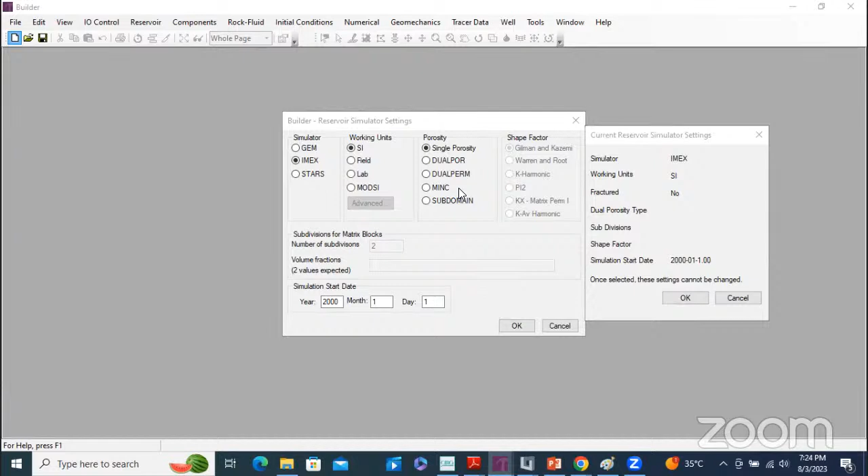He also asked about the porosity: single porosity, dual porosity, dual permeability, or other. Then he confirmed the simulator will be IMEX, the units, and the starting date. Any other questions? Okay, then tell okay.

From this screen, you will find an organized workflow to build your model, even a model tree view like that, or from above. After edit, view, and IO control, you will find reservoir, component, fluid, and rock fluid.

With relative permeabilities and other capillary pressure, initial condition, initial hydrodynamic model, and the numerical application. Also numerical and optional modules related to geomechanics and tracer, because this is very important if you go for advanced EOR to test, simulate, or make a study for EOR. Then data related to well and other tools.

We will investigate these tools while we work. There are options related to window arrangement, like horizontal, vertical, or going from window to window, here to here, to move to another window.

To start your reservoir, you must create a grid or enter your static model, because CMG is not a static module like Petrel or Petrel static or Decision Space, but it can use the exported model from those. In another way, you can build your model here too, in a similar but less complex way than Petrel.

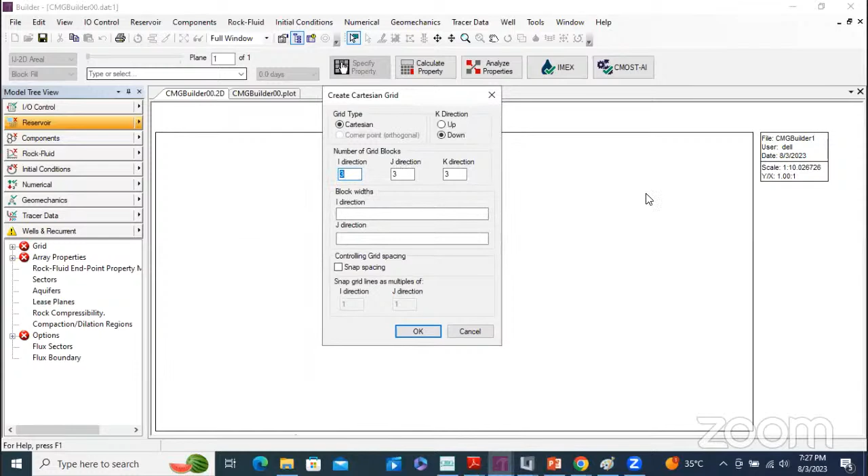Now I will select Cartesian, and I will put 3 blocks in the I direction, 3 blocks in the J direction, and 3 blocks in the K direction. Then I'll tell you - please write your question, and by the end of the session I can answer it.

So 3 blocks multiplied by the thickness of the block. It will be 3 blocks multiplied by, for example, 10 meters, and 3 blocks also multiplied by 10 meters for J. For the K depths, I will manage it once I build my model, my grid. So I will click OK.

So I have a grid like that, it's 3 by 3. Then I will go to this tab, it's called Prop Mode, and try to fill the properties of this grid.

He will ask me what is the grid top. Simple way, I will tell him layer 1, for example, 1000 meters subsea, and grid thickness: layer 1 will be 5 meters, layer 2 will be 10 meters, and layer 3 will be 7 meters. And then...

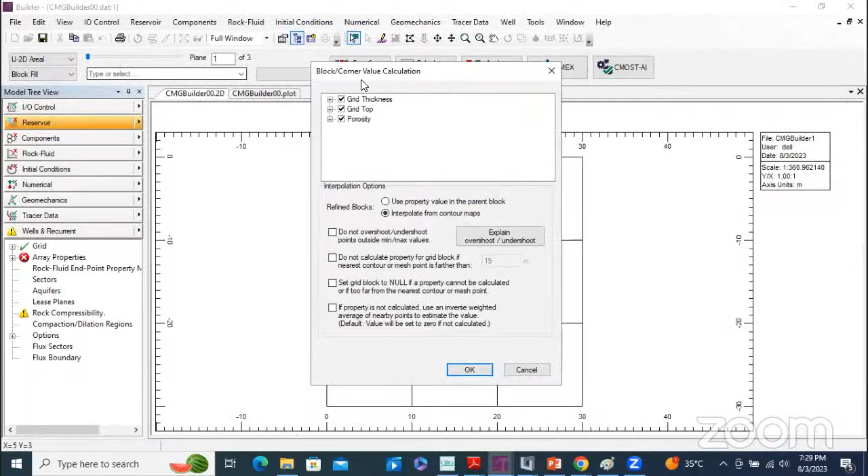Okay, and then for porosity I will also make it different: 0.2, 0.10, and 0.3. For permeability, I will make a function, so I will click here, okay. Then he informed me that I changed the grid thickness, grid top, and the porosity.

I tell him okay. So it's easy to go here to select your view: areal, or IK 2D, or JK 2D, or select 3D view, and from here it's easy to make a rotation. And from here it's easy to zoom in and come back.

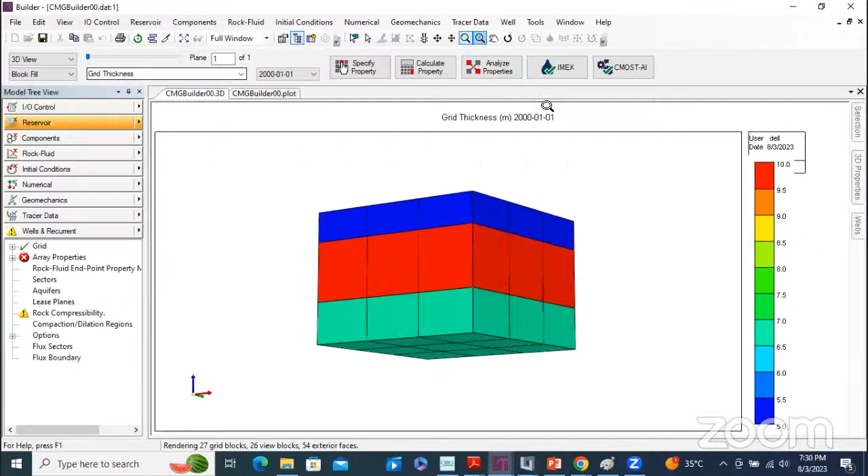So from tools we create a formula and we tell him new, add independent variables, and select, like, porosity. Okay, and this formula is related to permeability.

And we'll create a function between permeability and the porosity. So insert the selected formula, which means permeability equals porosity, for example, multiplied by 0.10%, from porosity. After that, we tell it to apply.

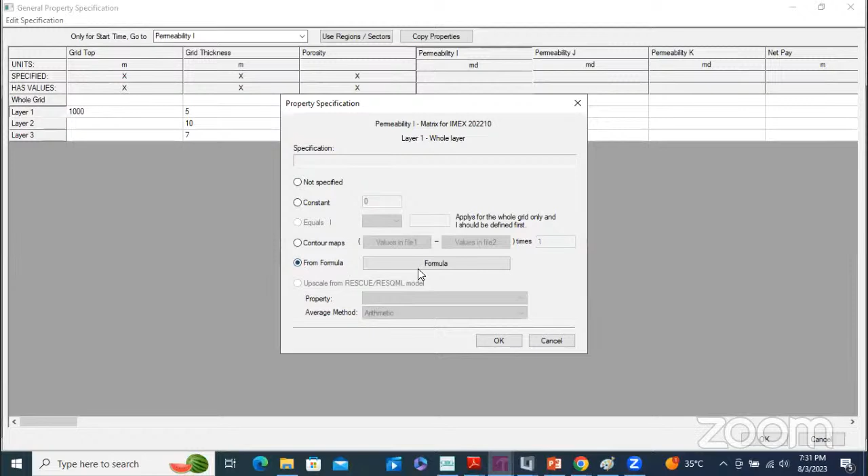Okay, and change the wrong to right, correct, and then click okay. Then specify the property again, and in permeability, we go to layer 1 and select formula, and from formula select here and select this formula. Okay, so the formula will apply in layer 1.

I can go make a copy and apply paste for the second layers. So I have applied the formula for all layers.

Then for permeability J, it's equal to permeability I. So for the whole grid, I can go and tell it not formula, but equal. It will give me a screen and ask if I want a constant value or equal I - yes, equal I, and tell him okay.

For permeability in direction K, I'm assuming 0.10% of permeability I. So I will give it, not formula, but equal, and tell him equal, multiply by 0.10, 10%, and okay. Then click OK. I changed now permeability I, permeability J, permeability K.

Yes, if I need to navigate each property from here - permeability I, permeability J, and also permeability K - you will find the scale here.

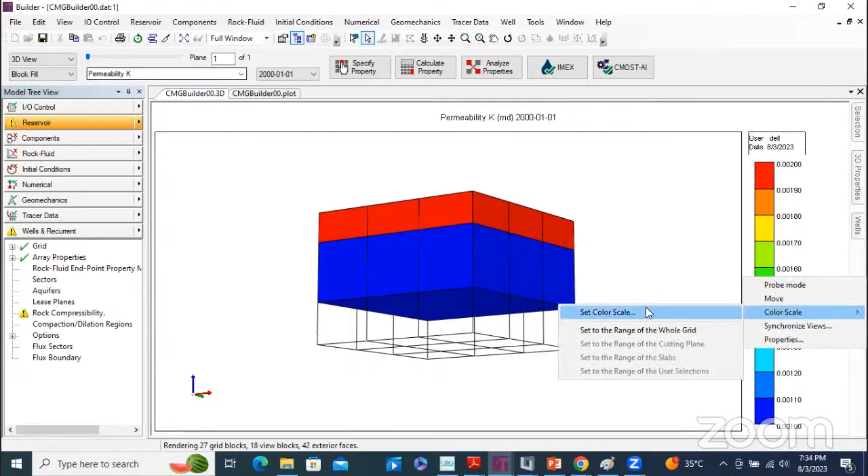Okay, so he made a filter. Anyway, if I need to select the original scale, I can go to color scale, set color scale, and select all the grid and then apply.

If I need to show the statistics inside this box, I can go to tools, then grid property statistics. It will give me the total number of blocks, 27, and number of active blocks, and total pore volume, and also statistics for permeability, like shown here, the minimum value and the maximum value, and also average value and the weighted average value, and also per each layer what is the percentage inside the graph.

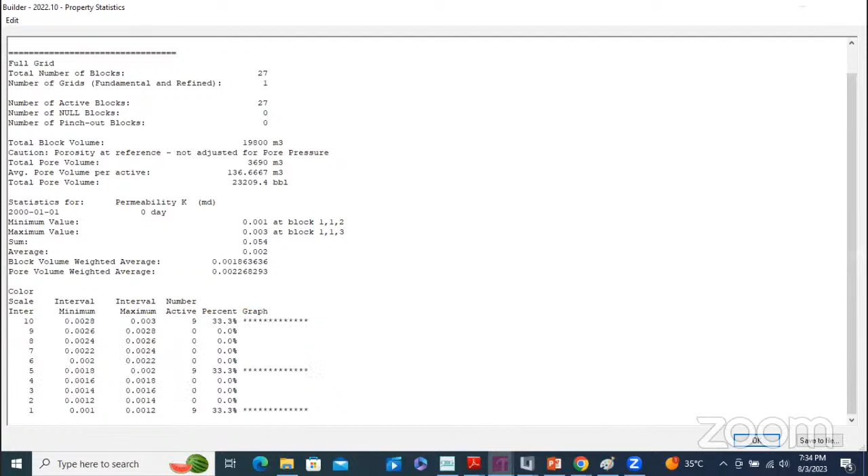So it's an easy way, if I change K permeability, it's easy also to go for the other parameter and check.

Just for the easy way, like I mentioned to you, every time you finish a step, it will be marked correct with green. If a parameter is still missing, like here, it will give us a warning. So it's easy for any engineer to follow step by step to build their model.

But now I just need the step to create a grid to start my work. The simple way, I just create a simple grid like that. If I need to know what is the problem, I right click and click validate.

It tells me a validate component is required, we need to fill this. I must require at least one table. So it gives a guideline to solve your problem, in easy language and easy steps to finish.

Again, if you go here, there is one parameter needed to finish. Maybe the model can still run, but it's mandatory for reservoir engineering, so it puts a yellow rectangle, triangle like that, and you should change the compressibility, something like that. So this is the first step.

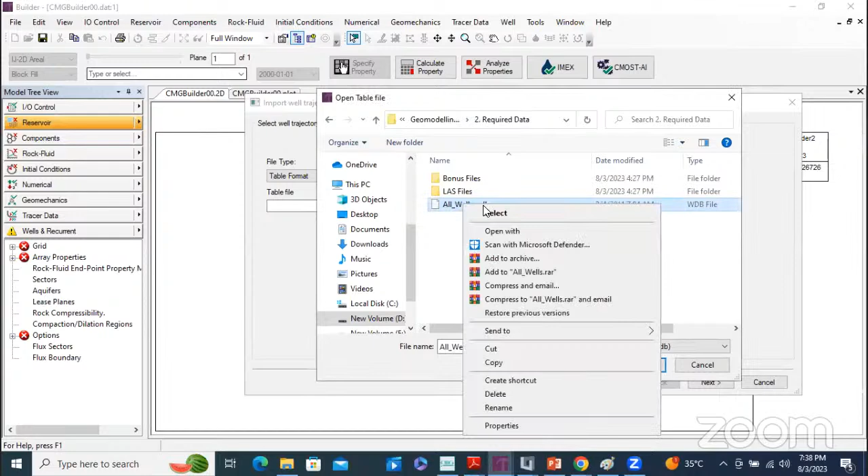Okay, so this is the table of all wells. If I open it, you will find units is meter, the same which I built. The name of well ID, and date, and X and Y, TVD subsea, and measured depths. So this is a normal table, and then I will open it.

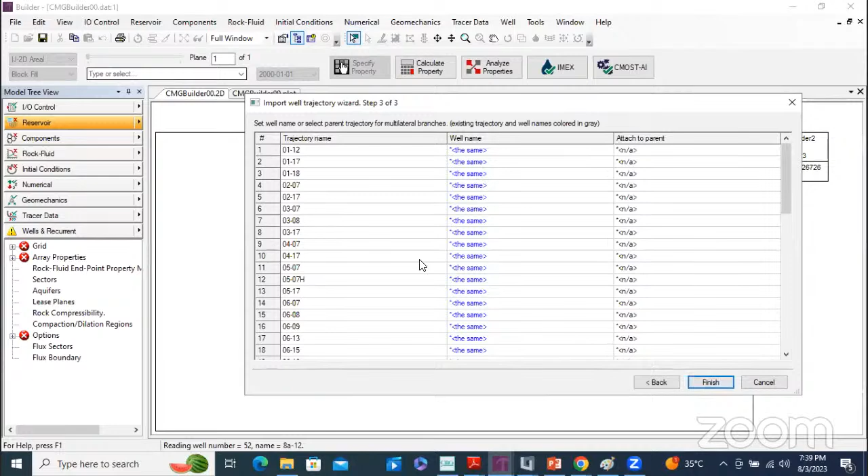Next, I will put him like that. If I need to deselect one of the wells, I will deselect. And then next, if I need to change the name of the trajectory, I can change from here like this, I can change the original name to match the trajectory, something like that. And I will make a finish.

So I loaded all the trajectory. If I make a zoom, okay, I zoom to the well here. It's a vertical well, but you will find the name of the wells in the bottom.

Like any software, if I need to change the properties of this screen, I will right click properties. This is the well trajectory, I will search for a well trajectory here, so I will go to here.

Then I will tell it to display on the top. That's it, simple way - change the location of the label to display on top. After that, I need to load the top formation into Builder.

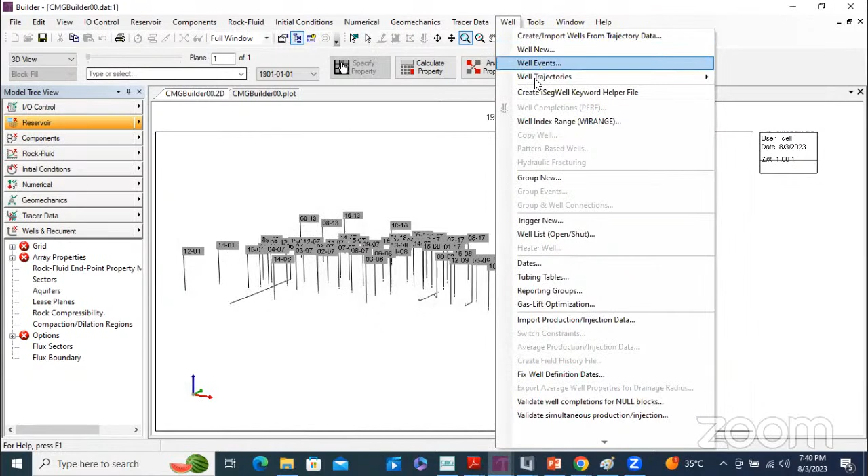I will go to well, no new well event. I will go to well trajectory, and from well trajectory there are options like import well log and import formation tops file. I will go to my folder.

Geomodeling, okay, required data tops. I will open it just to check. Okay, so there's the name of the well and also top and measured top, like that. Simple, not bad, simple table just to use as data entry for our model.

Okay, it asked me, the builder asked you to enter top, but there is no bottom, and you need to enter it. No, I don't need it now, so I will skip it.

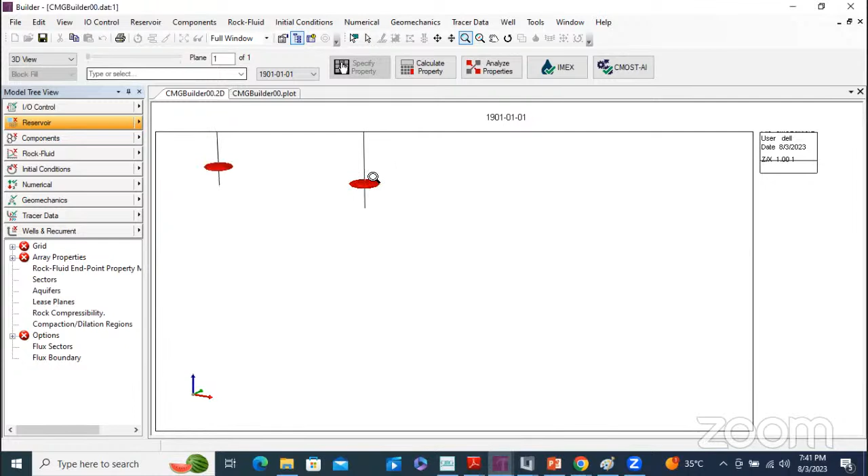Okay, did you see it? It's like red - this disk represents the tops of each well.

Then after that, if I need to change also the shape or anything related to the tops, it's easy - I can go to properties, well trajectory tops, and change the color. Let's change it to orange. Let me select another, dark green - apply, and change it to dark green.

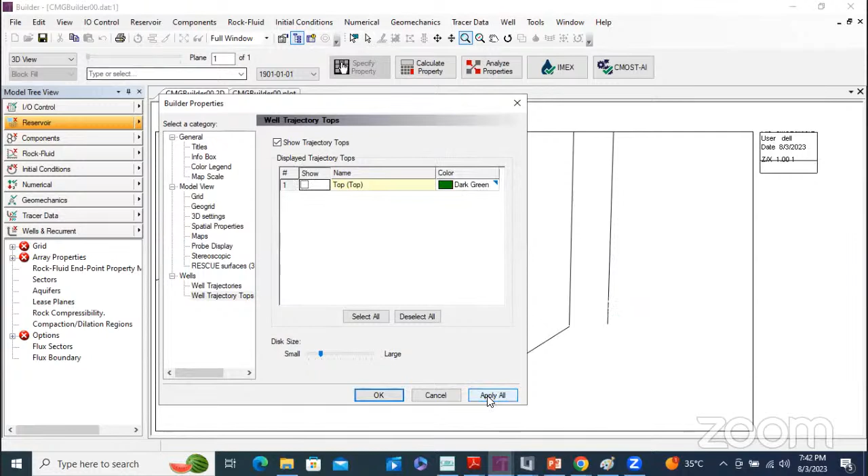Okay, so I input the well trajectory and the disk of well top. Then I need to create a map to make a contour mapping, and after that I can easily create any grid issue or something like that.

So I will create a map file, and this is the map file, whatever the name. And from here, I will go to import the logs with the well tops.

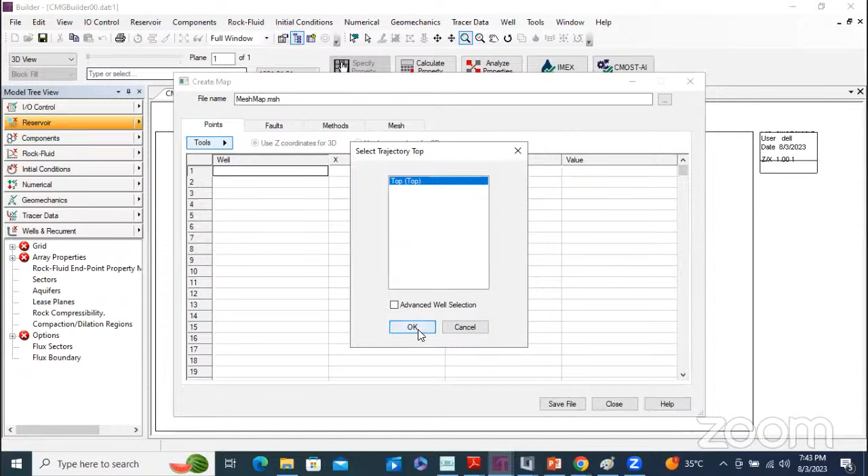So at this point, it can easily create - sorry, from here I will use the well trajectory to create my map. So import tops from trajectory, yes, using the tops. So well X and Y, and also put the value of the top here.

Then, fault - I can put fault, but in this case I don't need that method. Then I need to distribute the spacing of the tops between the shape of the round between the tops.

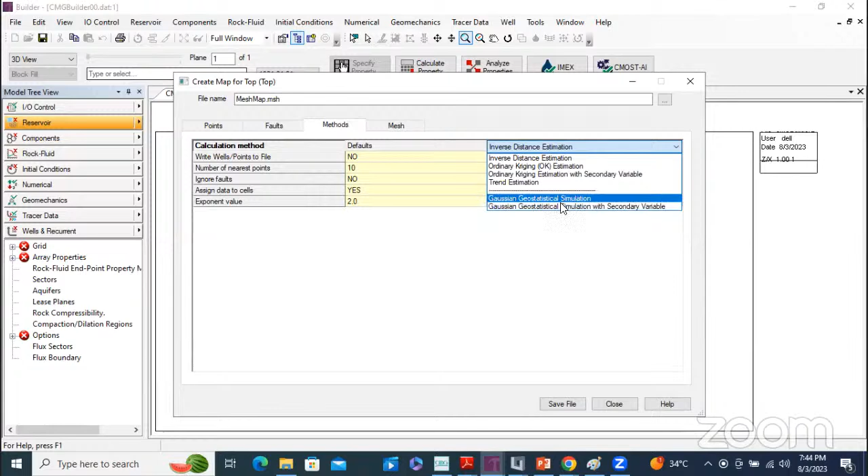So I use the statistical method to create this distribution. There are different ways to create simulation, geostatistical simulation, to create these tops. For example, I will select here, and change not in one direction but in two directions - so I will tell you by one direction.

So then I will check the variogram between tops and the variance between tops, simulated from the software, from Builder, and the actual data. So the dots, this one and this one, represent the actual variogram, and this is the data from the model.

After that, I will try to move this point - sorry, I cannot, okay - move this point to try to match between the simulated data and the variance, whatever comes from the simulation, which is the actual variance between the actual tops.

I can show that. Once I have the match between the simulated data and the actual variance variogram, it can be used to build my model, or to build the contour map as the first step of this method. So it will take time.

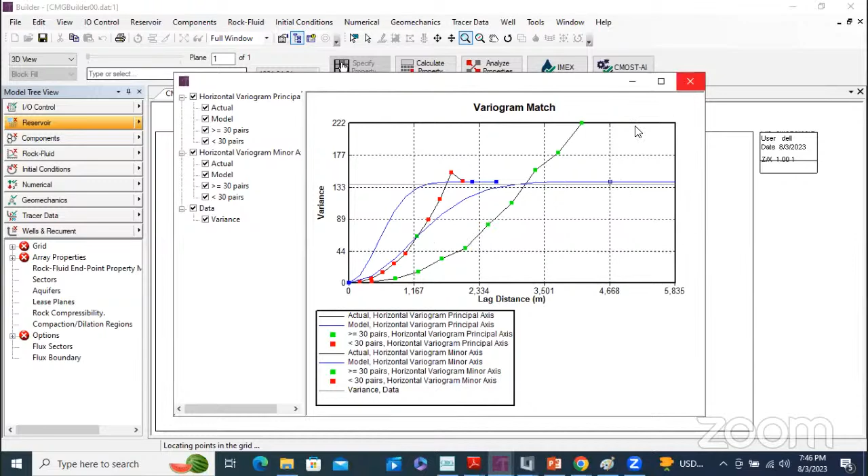So I will change it to Gaussian, then okay, and then check the variogram again. There's a change in shape, try to rematch, and so on. Anyway, I will not complete this now. Then in mesh, I will select how many mesh points to be used in this step, and if it's okay, I will tell it okay at the end.

But let's load the good one. So, open map file - it's saved in CMG mesh format. I know that, so I will use it and go to the folder.

Here - okay, and then top map.mesh, and then okay. If I change the view to 2D, I have a contouring map using the top and trajectory.

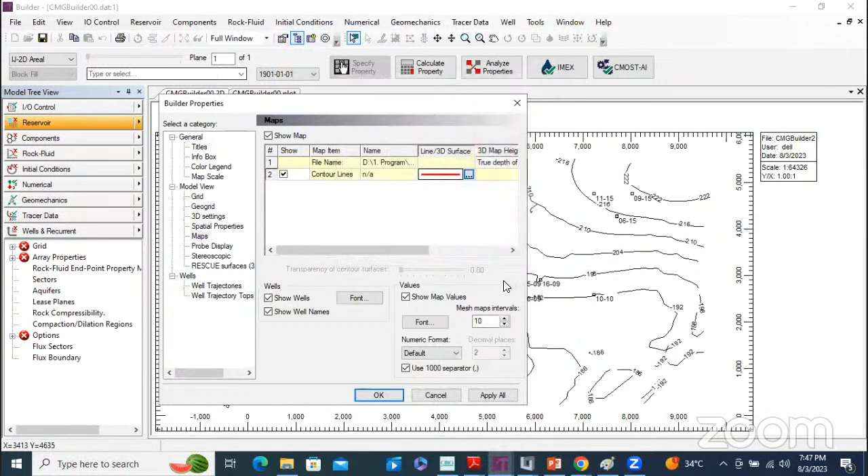If I need to change the thickness of the contour or color or something like that, it's easy - on this step I will right click properties and go to grid, then go to map. In maps, there's a contour map option. It's easy to go here and change the color, for example to red, increase the weight, white, and apply all. It's easy to change it.

So I have a contouring map using trajectory and tops. And now I will create a grid to create a box model, whatever - create a shape of the reservoir to be used for the model.

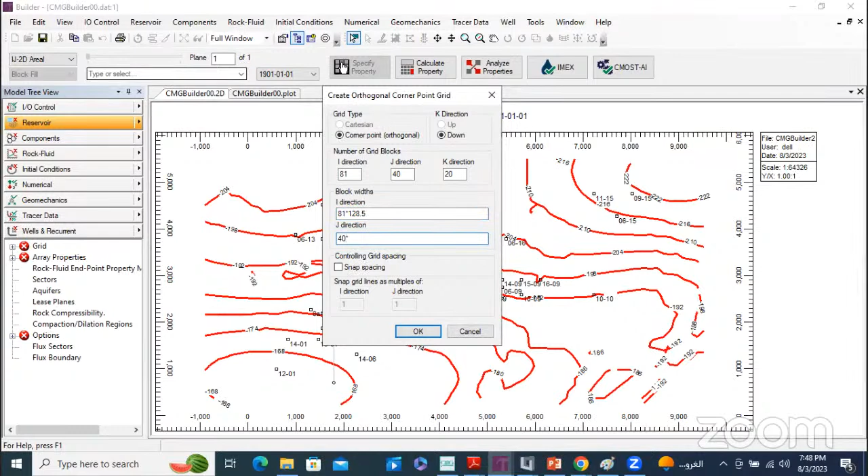I will go to reservoir and create a grid using orthogonal corner point. I already did this before, so I'll tell you how many blocks: 81 in I, 40 in J, and 20 layers. So I will write 81 blocks multiplied by 128.5 meters, then 40 multiplied by 128.5. Then I will click OK.

I created the mesh grid, but unfortunately its position doesn't match the map. So I will go here again, edit grid, reservoir, edit grid, modify position. I find the Y offset here is 5,300, so I will change it to 0 and click apply.

Now it's okay. So I created a grid, and a simple contour map using trajectory and the tops. Now I'd like to make a thickness for each layer, create tops for each layer, identify tops for each layer, and also thickness and all the other properties.

From here I go to Probe Mode, called Probe Mode, and specify property for these grids. Until grid top, I will go to layer 1 and click here. Do you remember we already created a map? It's called mesh map with geostatistical distribution between tops, so we'll use this map for grid tops.

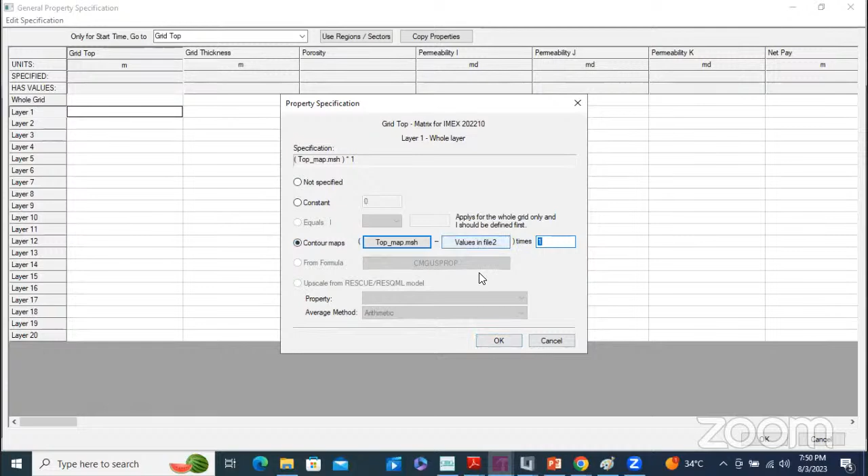So we'll go to geological map and contour map, value in file. We'll go to file, top map, until open. We don't multiply by anything or subtract anything. So this is the top map.

For thickness, we have another map, the thickness grid. We will use it, contour map, and it's called thickness map dot mesh also. There are different extensions if created by other software.

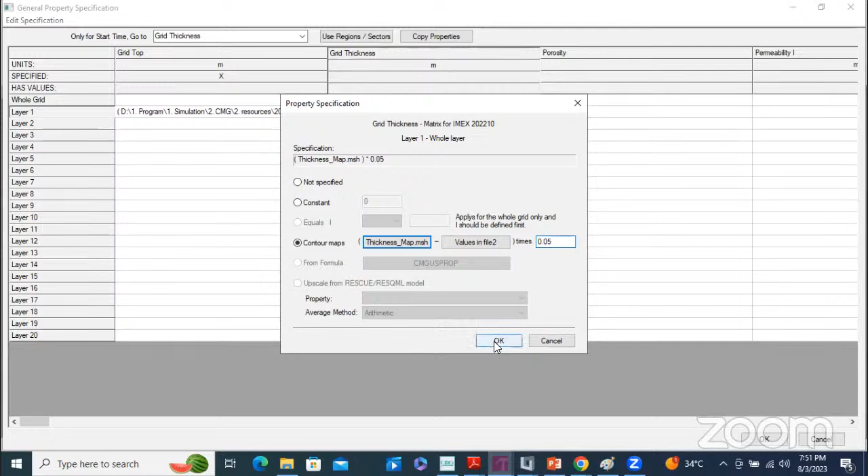For thickness, we will multiply by 0.05, to divide the net pay thickness into layers. This is a simple way, just a simple way. If you have logs, we can distribute using logs instead, to find the thickness and make a best fit for all layers.

Now we have a grid and thickness. If I click OK, you get the grid, grid thickness, and grid. Yes, OK.

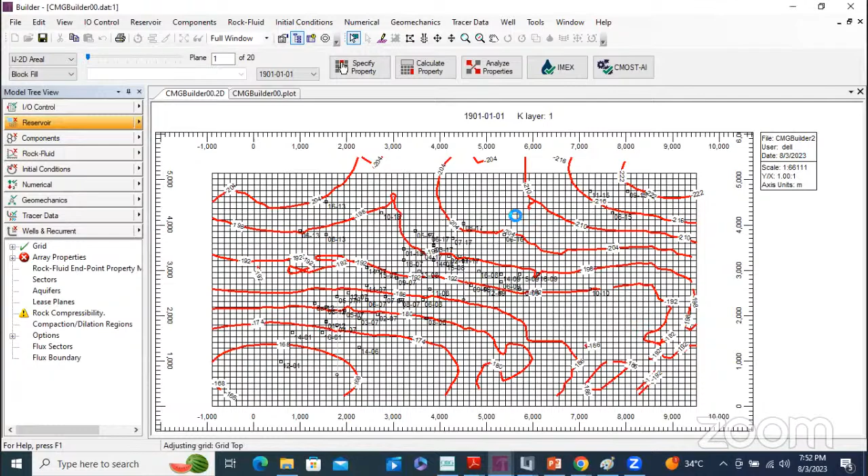So in just 10 minutes, you create your grids. And if you go to 3D view, it's easy. I need to not show the contour map, so I click properties, for the map contour I click here. It's easy, and then it's easy to zoom and define each layer.

Now I need to make a distribution for properties. Do you know how to distribute the tops? We will follow the same methodology, but using logs, not formation tops. We'll use logs to distribute porosity, permeability, or anything. So we'll go for reservoir here.

If I go here or here, I will select here, then go down. There is geostatistical, I can select here. Then I will create a new one from here, name it. It's empty, so I will create a new one and call it porosity underscore simulation.

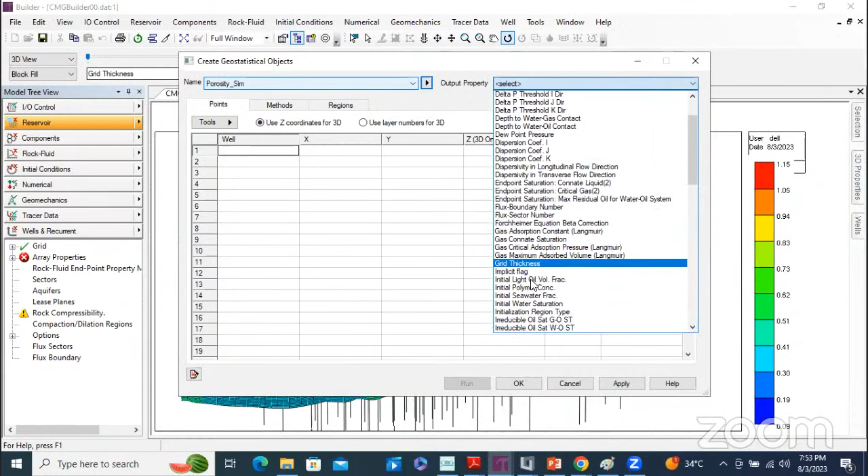Then I will tell it I need to distribute porosity, so I can click P and it goes directly to porosity. Now I'd like to load the logs which include porosity, so I will go to tools, import the data from import logs or table of measured depths logs.

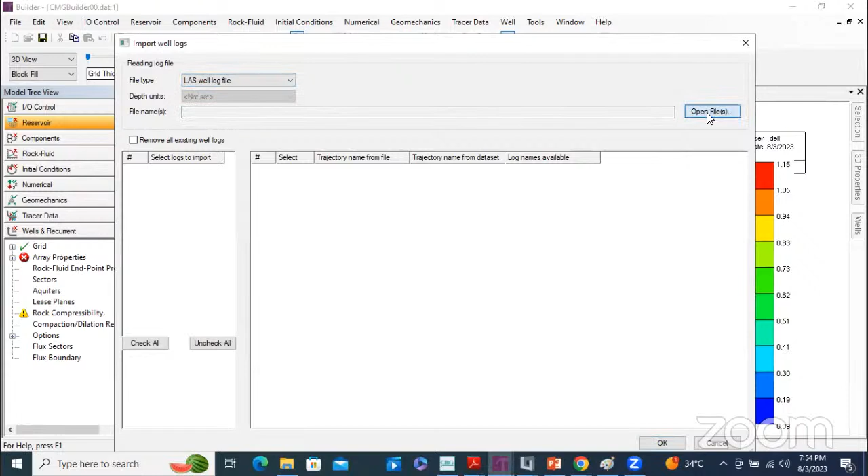We normally use a LAS file. So open file and LAS file, select all wells here with Control A, and open. It's easy to download. Now we'll click to load, it takes about one minute, and now we're loading all logs, and then we will select wells.

If we go, we can select well by well, or we can select all right here. Then click OK. Now we need to select the name of the log to be used, which is porosity, so we'll use the porosity log.

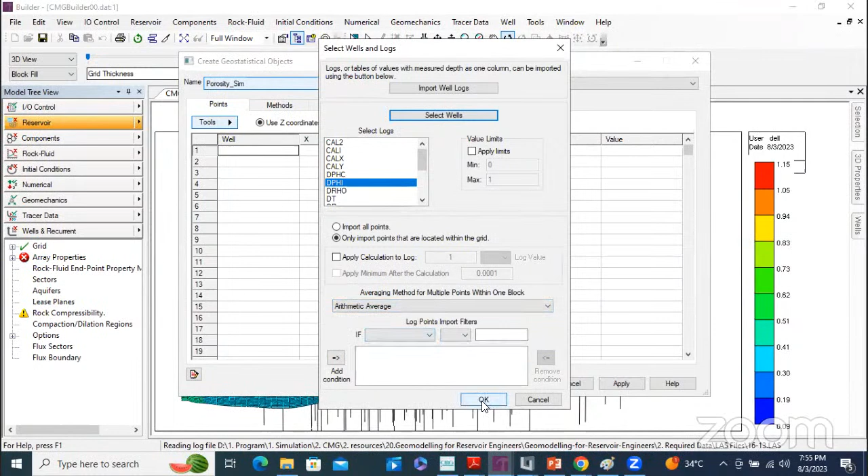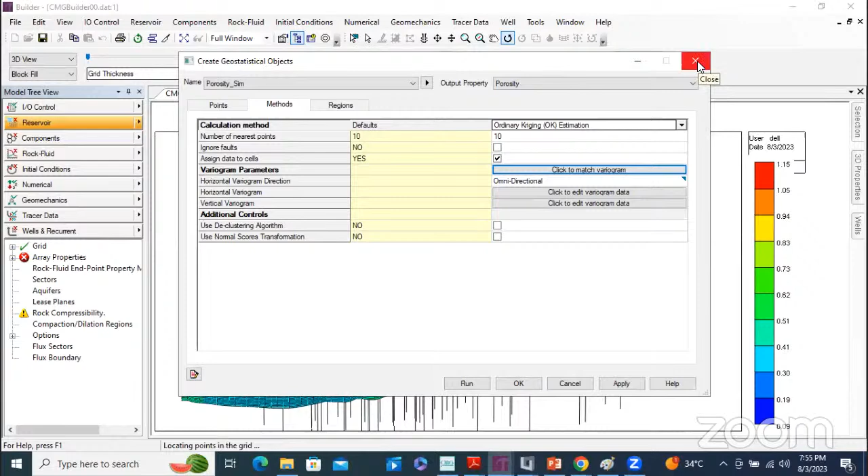After that, we should follow the same methodology like the tops, to make a distribution using statistical and geostatistical methods. Here is the function, and here you can see the variogram and check the match. For all properties, we do the loading like that. I will show you now.

Cancel, yes, I don't need to save, and I will close these also. I will go to open the one I have, the model distribution, after completing all distribution of all properties. It searches for a mesh map location, so I will go to it. Okay, okay.

Here, after loading all the data, especially for the grid, in this GeoModeler all components are already loaded. I will go through that, but anyway it's correct, meaning every parameter related to the reservoir is defined.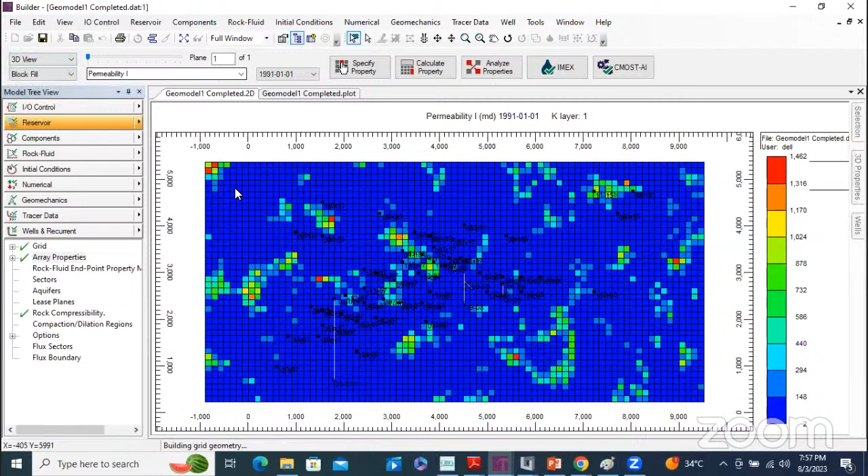Porosity also, all of these things, and rock compressibility - this data is already defined for these grids. If I check the 3D model, 3D shape, it also defines the 3D shape here.

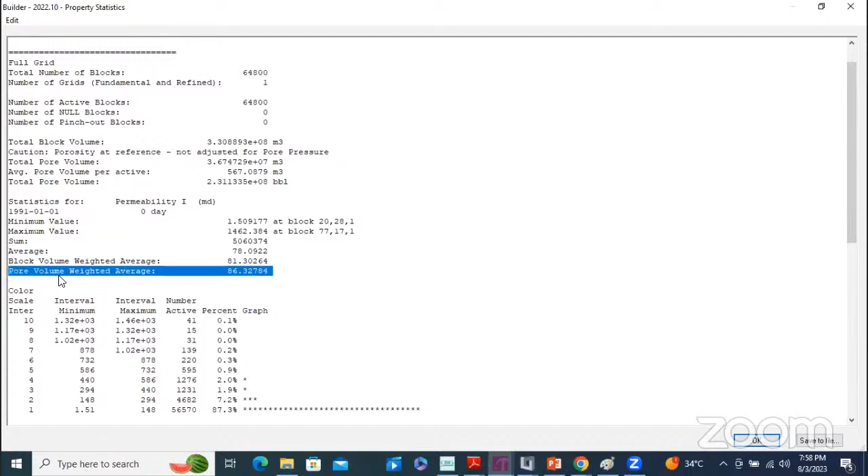I can make a filter by changing the range, or I can go to tools, then grid, and property statistics - it's easy to find. This shows normal information about the grids, and statistics for permeability: the minimum value, maximum value, average value, weighted average value per block volume, and weighted average value per pore volume.

Okay, so I have statistics and definition of the grid. In parallel, also in CMG, if you select Probe Mode on permeability, it's easy - if I click the left button on my mouse, I can easily check block by block what the permeability is. This is 40 millidarcy.

If I go here, this is a higher permeability, 633 millidarcy, and so on. So I can check the model like that.

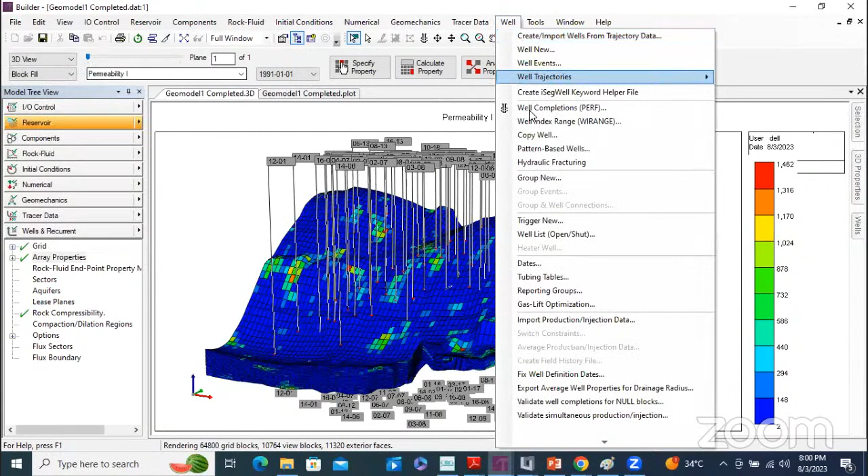A second way to create your grid before you start the model: the first way is to go here and simply create a grid - Cartesian, radial, or something like that. The second way, as we showed now, is from tops - well trajectory and well tops - then define from the map, and then make it geostatistical.

Somebody asked something - not showing depths until the unit is set in the software. The unit is usually not defined until the first step of building the model. So if I go here, I will close and create a new one. You should define the unit before you start - check what unit is used in logging, and what unit is in your data before you start to build your model.

I think and believe in Petrel also, before you build your model, you should define the unit, because there is no converter once you build the model. Here it's also the same as Petrel.

Okay, we'll go here to the model. Now I'd like just - okay, I don't know, there's something wrong, but no problem. I don't know why it changed, but okay, close. This is not the completed model.

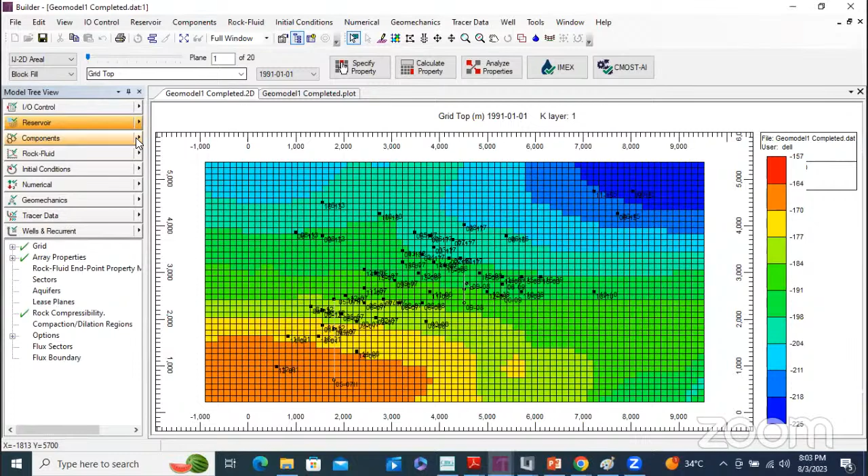So from here, if I select a component and go here, it's an easy way to create or generate your model by black oil - or if you don't have lab experimental data and equation of state, you can use a correlation instead.

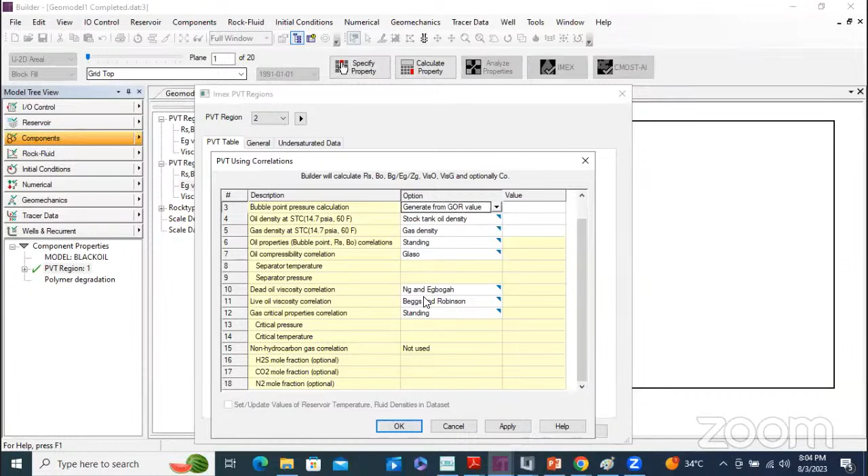So from here you will add a PVT, and then generate the PVT table using correlation - a simple way. You tell it some parameters related to reservoir temperature, bubble point if measured, or calculated from gas-oil ratio, densities, something like that - and what correlation you suggest to build your properties. With simple information, it's easy to create these properties.

I will delete these, yes, I don't need them. And if I go to... sorry. That's it.

So here, this is the data already entered into this software. He defined only temperature, oil density, and gas gravity. For oil density, you can select stock tank oil density in normal units, or a specific gravity of oil, or API. For this example, the API is 35 degrees.

It's easy. Also for gravity of gas, what is the water phase, for the formation volume factor. These items are defined, then you generate water properties by defining temperature, reference pressure, and salinity. After that, the software directly defines the properties of water.

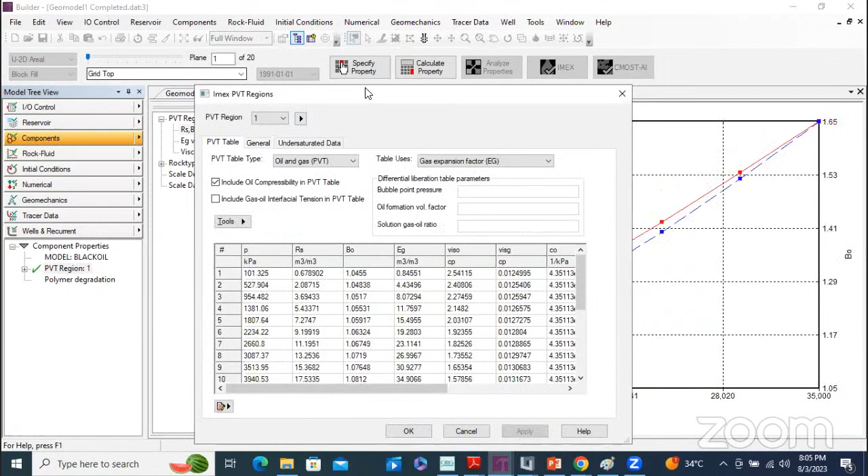That's it, a simple way to define your PVT if you don't have a complete PVT. If you have a complete PVT, it's also easy. You can go here and input a PVT table, generate it, and once finished, click apply. The PVT table will be created directly.

Another way, if you have a PVT table, it's easy to create it - just copy paste. The other point is you can create a PVT using a CMG application like WinProp. It's a compositional equation-of-state application to create a model of the fluid, and it's specialized also for heavy oil, solvent mixtures, and CO2 mixtures. So it's beneficial to use for EOR projects.

Okay, let's go to Builder. So this is the components section where you enter your components. If you have a WinProp generated model, you can create it or launch WinProp from here and start editing that. The main advantage for CMG, if you go to component, there is something called the process wizard.

From the component process wizard, if I select it and the model is black oil, it gives me an option to create issues related to polymer injection. It gives guidelines for this, like the upper viscosity limit for polymer, and the lower minimum average permeability, as a guideline to support any engineer to work easily. It also requires parameters like polymer half-life and other parameters needed for your application, so it facilitates your work, especially in a complex project like EOR.

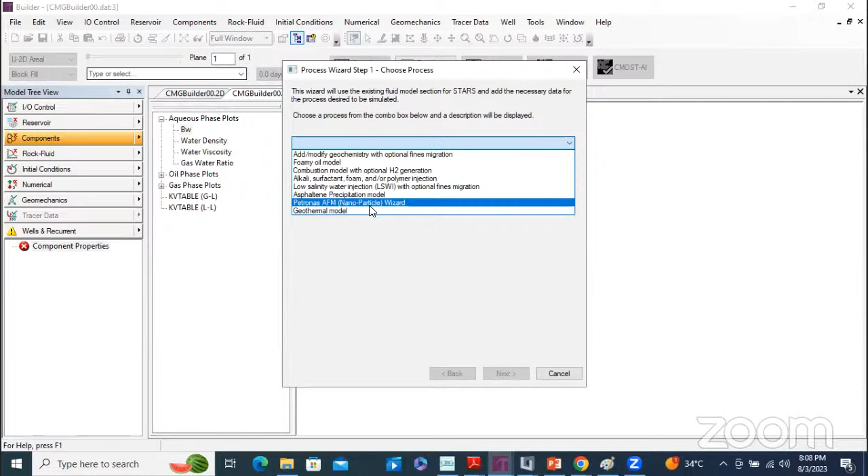If I go to component here, like I mentioned, and go to process wizard, there are different applications like add/modify geochemistry, foamy oil, combustion model with optional H2 generation, low saline, alkaline, surfactant, foam polymer, asphaltene precipitation, nanoparticle, and geothermal model. If I select geothermal model, this is a new application for any reservoir engineer that will be used in the future.

It gives us some indication to work on it, and lets us choose a geothermal model we need, for example loop, which is easy to fill up and facilitates your work. So CMG is not only a simulation tool, but also facilitates your work as an engineer working in EOR.

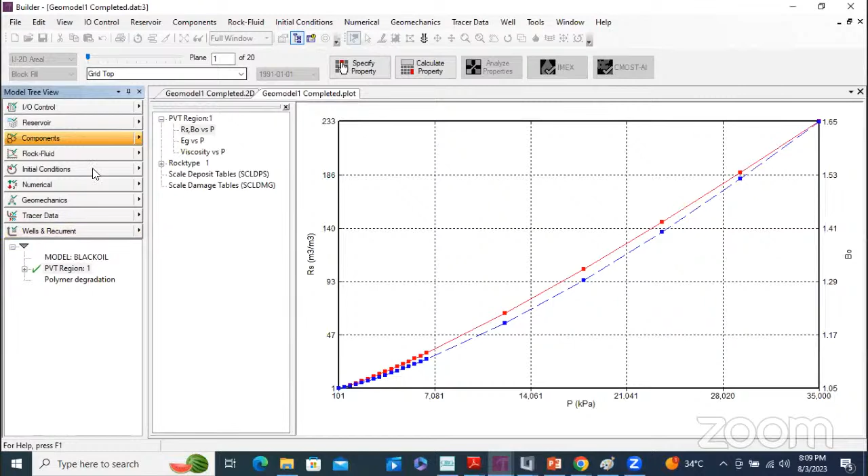Now let's go back to Builder, and I'd like to show you the option also for relative permeability. If I go to select rock fluid, and select rock type here, it's easy to generate a table using correlation - just enter the endpoint and put the exponential parameter here.

It makes a suggestion for the exponential, like 1 in a fracture or system or something like that. So it guides you to create the curve just using the endpoint and the exponential. Easy to create, or you can paste the table. Also include capillary pressure here in your table, and due to injection you need to work on hysteresis modeling, so it gives you also an option related to hysteresis.

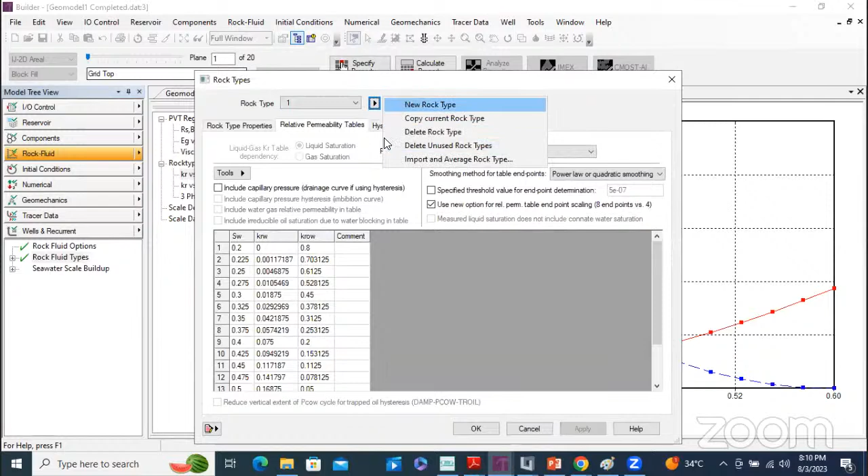Sure, you can create different rock types by creating a new rock type here and then distributing this rock type on your grid. It's easy to change if you're working on a history match and need to adjust this curve - just move it from here. It's a good option to change the shape of the curve.

Once you change these points, it directly changes your table. These points will affect negatively once you run the simulation, so you need smoothing. In the tool, you give a smooth table and click OK, and it will smooth this table.

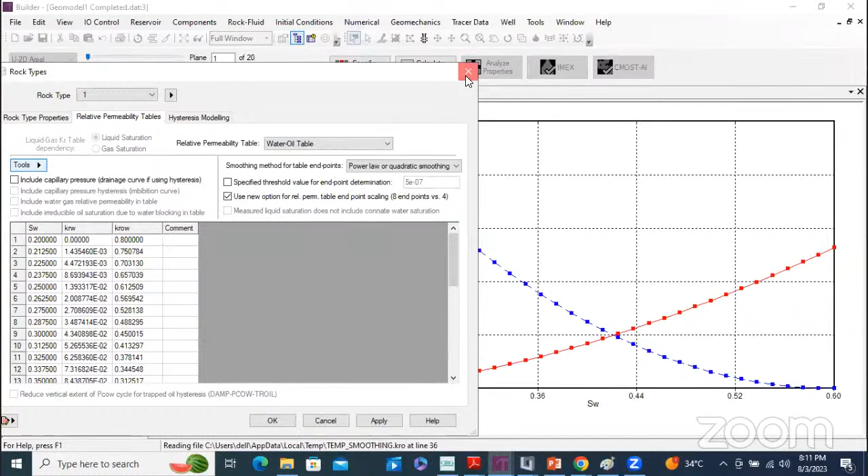It's easy to build your relative permeability curve, easy to move or change the shape of the curve, even change numbers or change the shape. Also there are options to change curve scaling. Here we don't need to change the curve, but change only the endpoint, and then click OK. It's easy to change your relative permeability.

I will show you also if you go for a thermal model, there are options also for thermal. If I go, like I told you, this is the reservoir, this is the component, and this is a workflow, so it's easy to work and easy to build. Now I will go to rock fluid, and there's a good option to use.

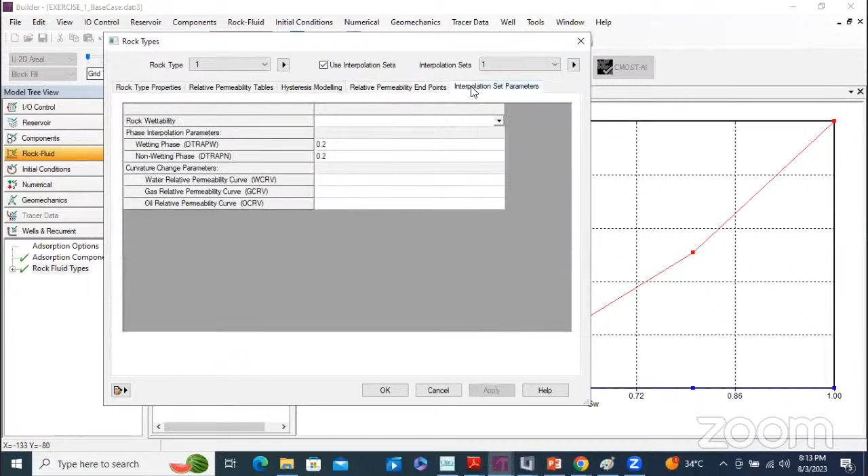Create an endpoint depending on temperature, because if you inject steam, the endpoint will change with temperature. So from the relative permeability curve table, it gives you the option to change what you have, either related to table value or related to temperature dependence. With temperature dependence, it's easy to create a range of temperature and also create interpolation sets to give the range.

What is the change of Swr in a cold condition and in a hot or steam condition? It gives you a variety, not just two relative permeabilities. It's easy to build, easy to create, and it affects your history match and sensitivity analysis. It's easy to work on.

I hope this part is okay, because in thermal you need temperature effect on relative permeability, since it affects reducing relative permeability to oil and sometimes increasing relative permeability to water by using temperature. So if I need to show the effect, I will go here to the diagnostic plot.

As you see here, there are two curves: one related to cold condition and the other related to hot or steam condition. What is the effect on relative permeability? Once the reservoir temperature goes higher, it uses the other curve or an interpolated curve between the two temperatures.

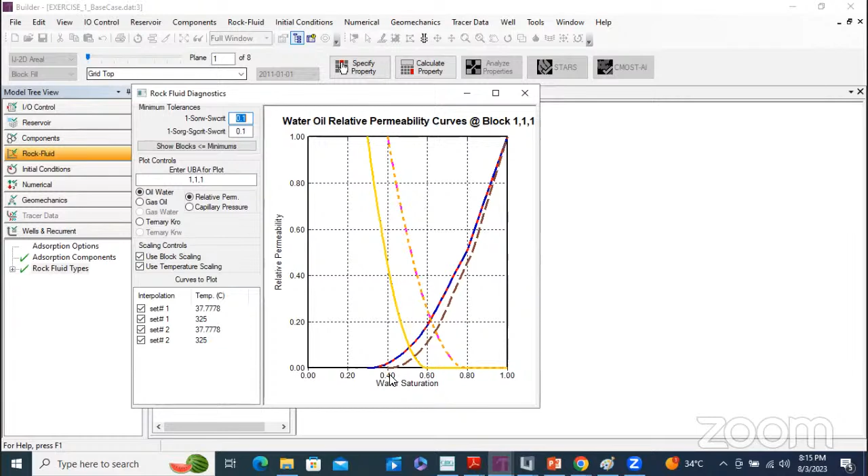Now let me show you a good small video about CMG, then I will create a thermal model.

From this video, the company tells us that using applications like IMEX simulator, GEM simulator the compositional simulator, STARS simulation, and Builder results, all these applications support activities related to advanced reservoir engineering: thermal, unconventional, artificial intelligence, machine learning, chemical EOR, and also geothermal and carbon storage. So we're speaking about a good application, good software to support any reservoir engineer.

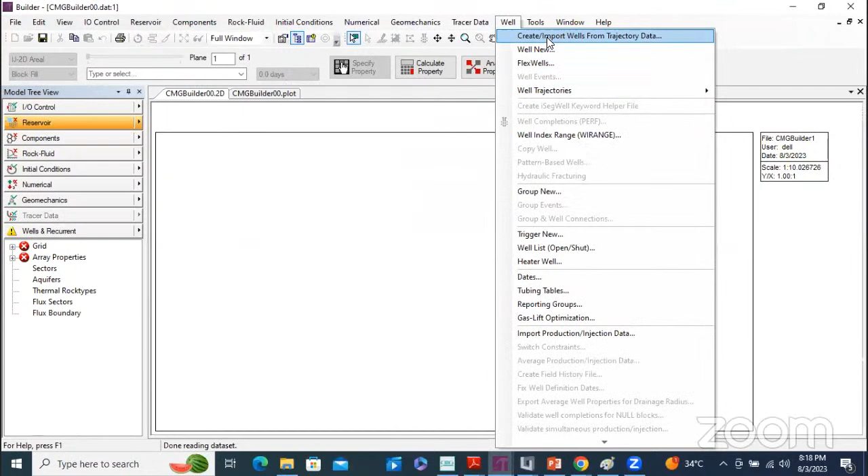So the last one, if I go here and create, open whatever I have, this is a RESCUE file. RESCUE file is extracted from other static modeling software. So from here I can open a RESCUE file, or from here I can import from another RESCUE file.

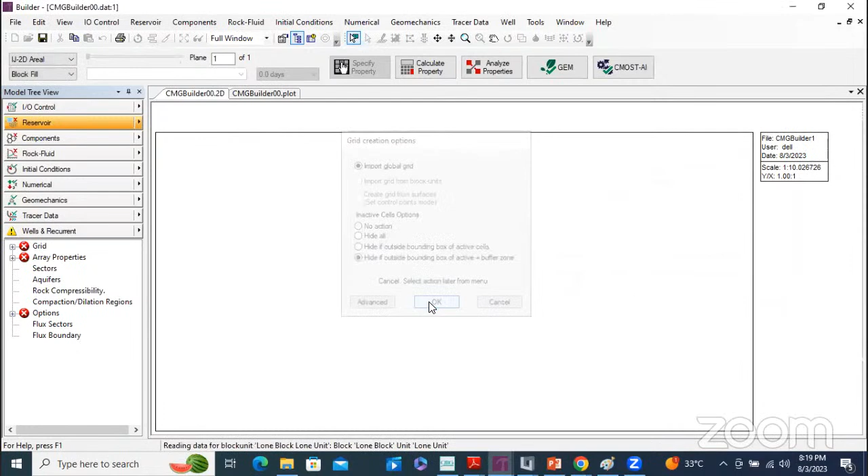Then from tools, I can go to create statistics for porosity here. So the minimum average porosity is 16% average porosity.

Okay, so this is the third method. Now we will create a simple one. Let's go here in builder, and we create a...

Thermal CMG stars. Then we will go to create a grids and create a quick pattern. Then we will select normal 5 pattern, area called it will be called 10 acres, and reservoir thickness will be 500 meter. Sorry, 500 meter. Top reservoir here it will be reservoir thickness, sorry, 30 meter. Top reservoir at 500 meter. This simple matter, and approximately block, the dip angle is 0.

Approximately block thickness will be 4 meter. Approximately block size in X and Y will be 6 meter. And then we will make a calculation. He will calculate X and Y. This is the shape of my pattern. It's normal, so 4 injector and 1 producer. If I click OK...

It creates the model. And if I go to select 3D model view, this is a view of the model.

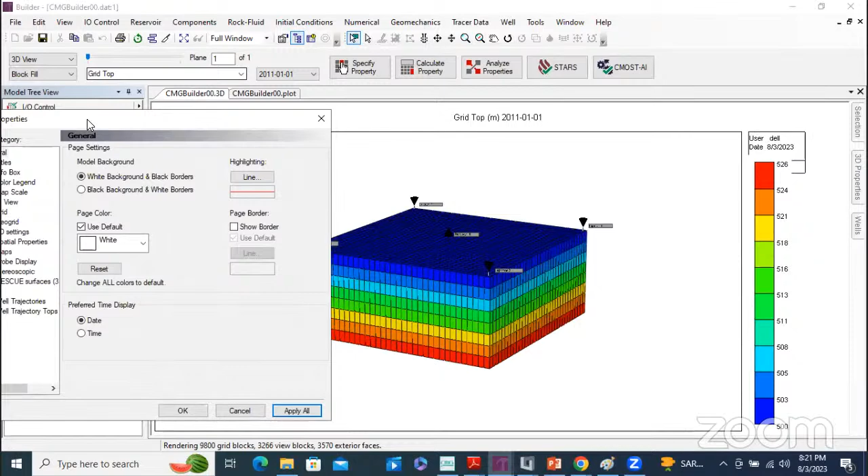If I need more transparency, so from here, properties, and then grid. Sorry, 1 minute. Let's go maps, 3D setting, and then I can add transparency. Okay, it will be like transparency to see the shape of wells inside the reservoir.

Okay, after that, I'd like to specify the property like porosity and permeability. So I go to specify porosity, permeability and porosity. So I will click porosity 0.30%. Permeability will be 400, and here also 400 millidarcy. I can write 400 or I can make it equal, okay.

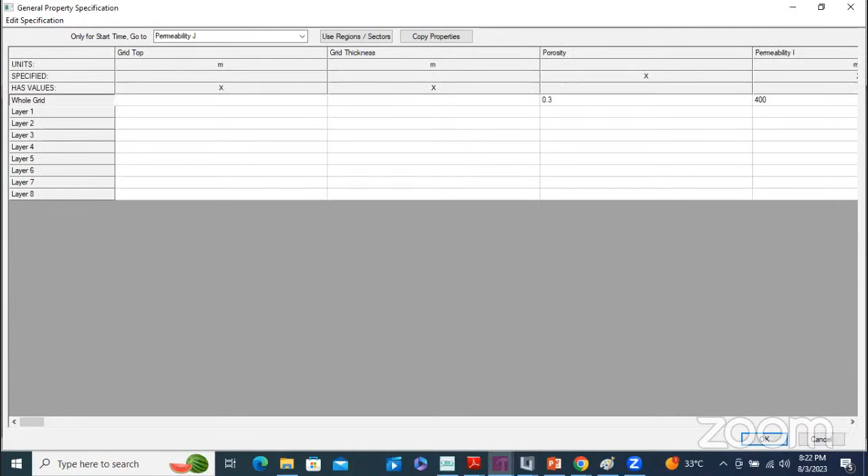And then in K, it will be 40, or I can make multiply by 0.10. Then click OK, then OK.

Still, I have an issue because... I have an issue, okay. No, I don't have any issue here, but I will go to define some thermal rock types. Here is the thermal, so it will define not only the permeability and the porosity, but also other parameters.

So for rock compressibility, I will create a new rock type. Okay, and for porosity reference pressure, I will set it to 8,500. Okay, and formation compressibility 1.8 E minus 5.

Okay, and then I can enter also some parameters related to thermal properties. I can just apply thermal properties. Volumetric heat capacity 2.35, this is from literature review, E power 6. And also I can put thermal conductivity phase mixing, put complex. Just a parameter, every case you can study, but this is just a parameter for tutorial, just to test the idea.

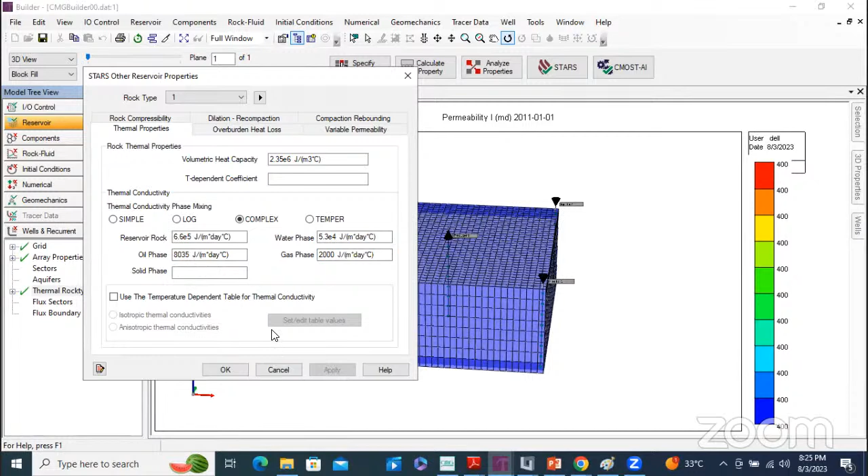Okay, you can also set overburden and underburden. Here you will complete all things related to thermal parameters like that. Then click OK. We can save it, file, save as, and then we can click here to search for the location. Okay, and I can save it like test. Save, okay.

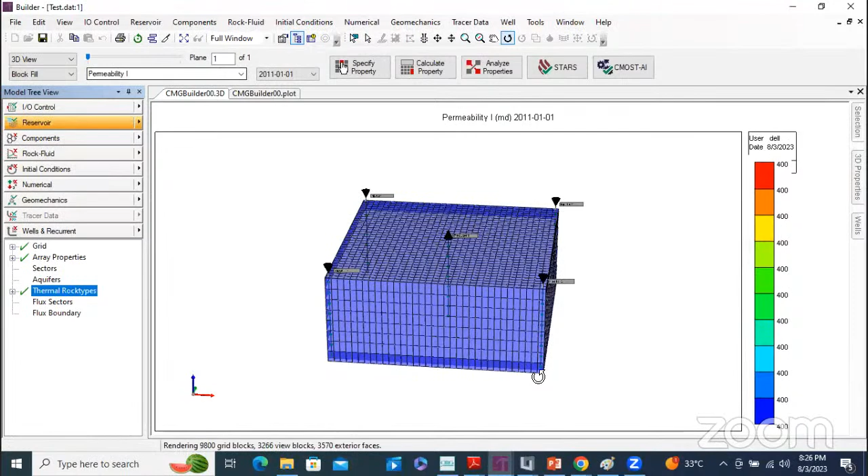Okay, then I will create a PVT. So I will go to component, click on properties, launch, sorry, import black oil PVT, because I don't have a complete equation of state or something, so I just have simple parameters from my fluid. Launch PVT, please select the unit first, so it's like SI unit.

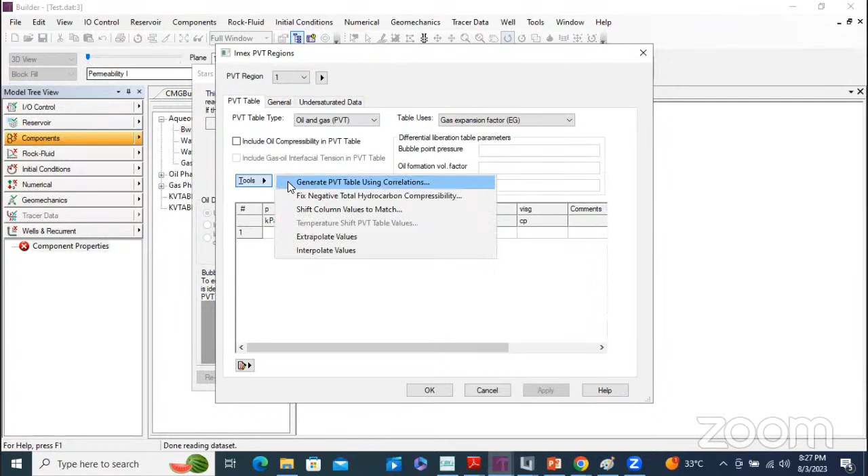Then I will generate. After that, I will go to tools. So I create one here, I have one. I create a tool and generate PVT table using correlation.

I specify reservoir temperature at 37.7778. Also, we can generate maximum pressure for the table, 12,000 kilopascal, and bubble point, assuming it's 8,576, and density, we can select API 21, and the gas density, it will be gas gravity 0.65.

Okay, then I will set and update values of reservoir temperature, fluid densities. Then I can create, apply. It told me, do you wish to include calculated value of oil compressibility? Okay, I can, now I will tell no, I will select to use a constant value.

Then I can go directly to PVT table. Okay, and I will find the PVT already created. But there are different checks.

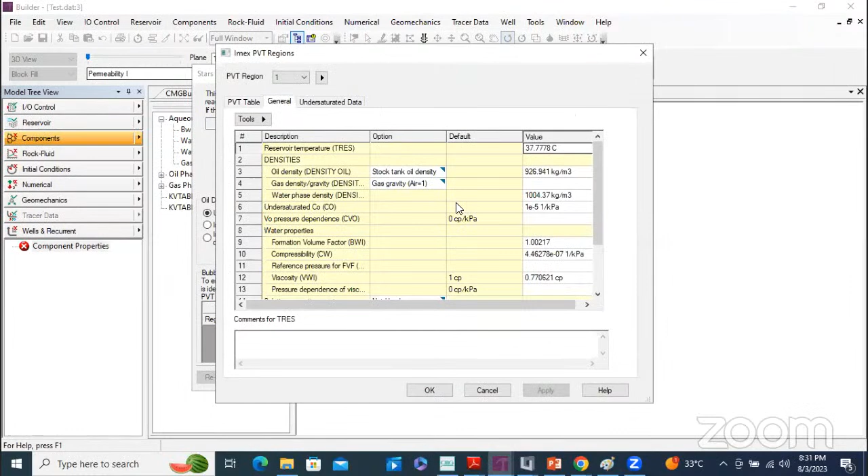PVT table launch, click launch. The data for gas density or gas gravity has not entered or is too small. Maybe there is a problem, so I will go here. Gas density, yes, removed, so it will be 0.65. So it guides you to modify if there is a problem.

Okay, again we will set the bubble point, 85, next. For water properties, okay, I remember this problem. Launch, okay, general. I don't know what happened, but anyway, 8576. Okay, so created, okay, created.

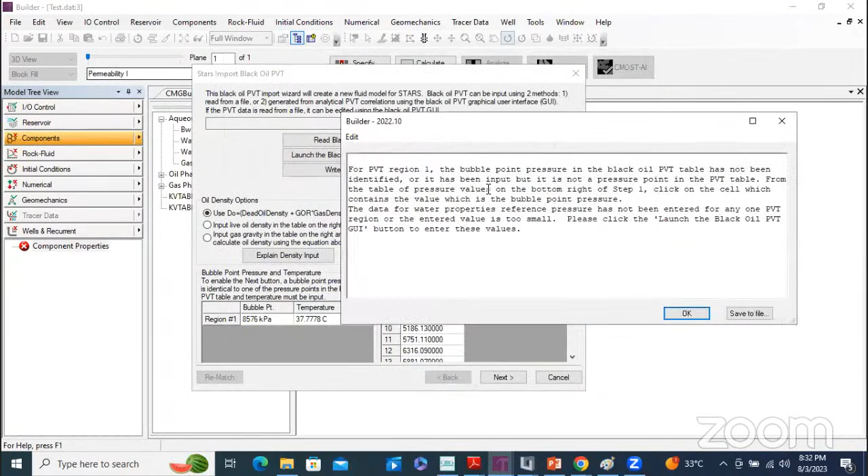Apply, come here. Okay. Set update value, forget this. Apply, okay, then apply, okay. Set a value.

Next, okay, so it gives us a number of components: oil, one, gas, thermal expansion. If I need to change this now, I will not change. Then for heavy oil and gas K-value, if I need to also change it, but now I will not change.

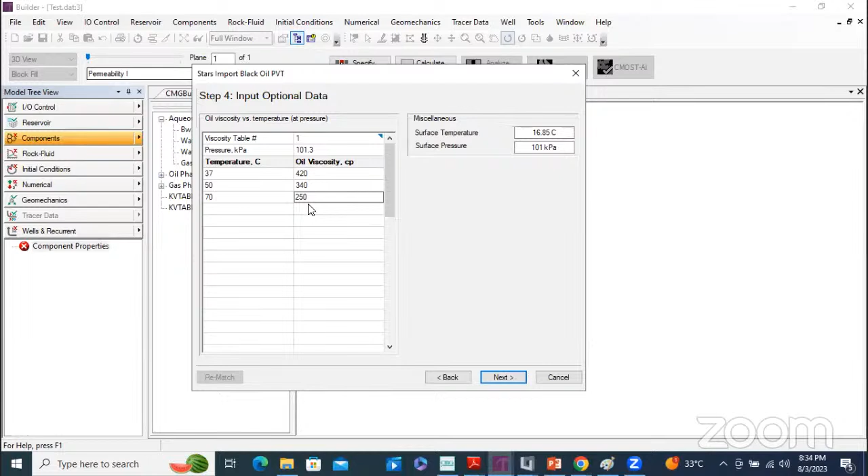Then for heavy oil we need viscosity measurement, so we'll put temperature versus viscosity, and also whatever you have in pressure. If you measure this viscosity in a lab at standard conditions, it's okay. If you measure at a higher pressure, like reservoir pressure, we'll write it. Here I write a temperature, then I will write it in. So it facilitates building your PVT even without a full equation of state model.

Okay, so try to match with correlation. Okay, then build done, done, finish.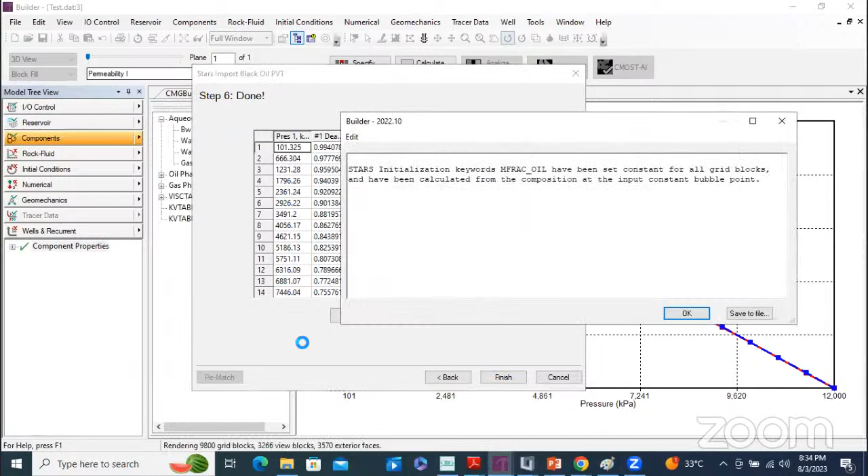So now you have a model of the PVT component. For time, because we need to finish, but this is one of the main workflows to build the thermal model. I will go directly to the next stage, but after building relative permeability, just to show you what is next. So I will open it.

Okay, so this is the same parameters, the same component, like I mentioned, the same grid, like I mentioned. If I go to create 3D, it's a five spot, like we have 4 injectors and 1 producer.

And now for rock fluid, you remember what I presented for you. If I go here and to the diagnostic plot, there are 2 curves, one at a lower temperature and one at a high temperature. So we define this.

Then we define initial condition. It will select what is the vertical equilibrium calculation: depth average capillary, gravity method, or don't perform vertical equilibrium calculation, or block saturation. Because this is simple, we'll use depth average capillary pressure calculations.

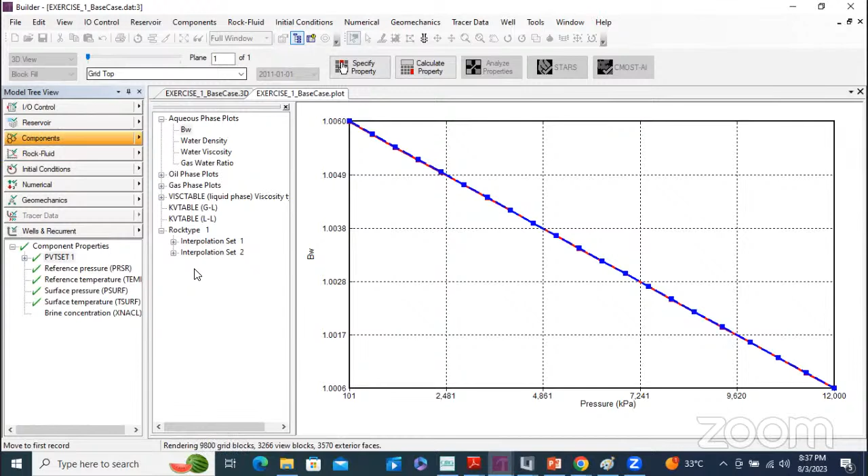Using a simple way, and here as rock fluid, rock fluid relative permeability, which depends on temperature, initial condition.

Finally, numerical: there are some change controls related to numerical settings to facilitate your work. I will show you, but in the course there are more details, like the first time step size, which will change. This is the time to start the calculation, and other issues will support the calculation to accelerate the performance of the model, especially in a thermal case.

It's recommended by the company itself, so they give us a manual and tell us, if you run thermal, use these parameters.

Geomechanics, sorry, is optional, so we won't go into that. And for wells, we need to define the well, so we'll go to wells here and define the parameters for wells.

Before we build, I'd like to show you something. If I go to create from here, okay, new STARS, SI, whatever, okay.

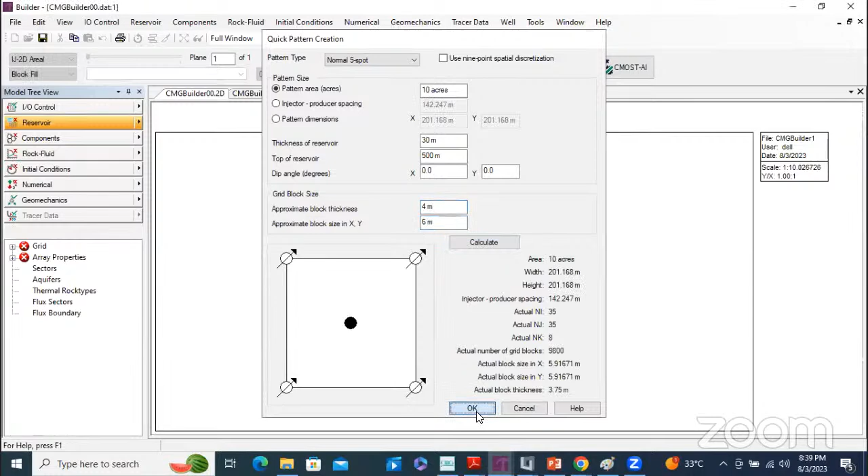If it's 3D, so this is the 5 wells. If I go to wells, there are red bullets. If I go here, there are only well, injector, and injected fluid. But he recommends injected fluid is water, but it's not water, it's steam.

So we should define the steam parameters, like temperature and the steam quality, and the pressure if you have information about the pressure, and also constraints. Here, let me put steam temperature as 325. Steam quality is easy to build, around 65.

Sorry, do you want to apply the change? Yes. And if you constrain, you will operate maximum bottom hole pressure. We put 12,000. Okay, and click apply. So we have like this.

We need to transfer all of these actions for wells. So we'll select injection by pressing control and select the event, copy event using the filter, and select the other injector here. Select, and then the date which you need to add this. I select this date and create a new date for the selected well if they don't exist, then search and add. Okay, and then click OK.

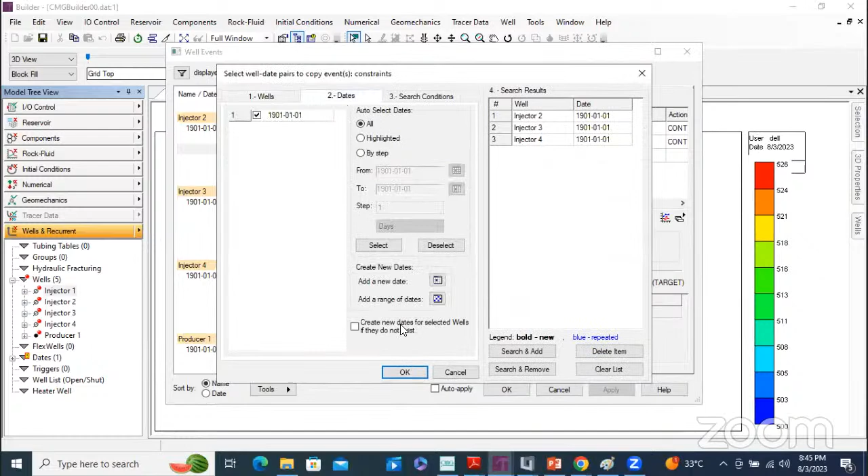Then take constraint, copy event, select the other injector, dates, create dates - no, search and add, okay. If I go to here, I already copied the same constraint for all injectors.

Okay, so I will go to the case. Go to the case. Now all of things is right, so it's okay. Simple build model and the well constraints, well condition is defined, so it's easy to initiate the model.

So to initiate the model, before initiating the model, you should select what is the output report. From the output report, you get simulation result output, and tell the simulation what data is needed, which data needs to be output and the frequency. So go select, and from here, for example, we select net cumulative energy and net heater rate.

Of course, we need pressure. Relative permeability, let's go pressure. So we select the pressure and also select the grid, for a grid or for well, something like that. And the specified frequency here, every time and date and something like that. So we build the model reservoir.

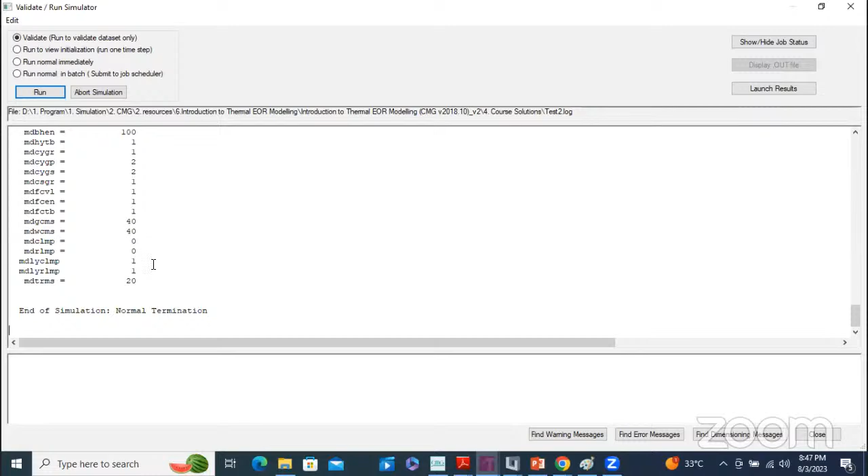There is no error, no problem, no error message, so it's okay. We can run initialization just to know the original hydrocarbon in place. So run this initialization, and there's a table below telling us the oil phase volume, the solid phase volume, the gases volume, initial, of course, something like that.

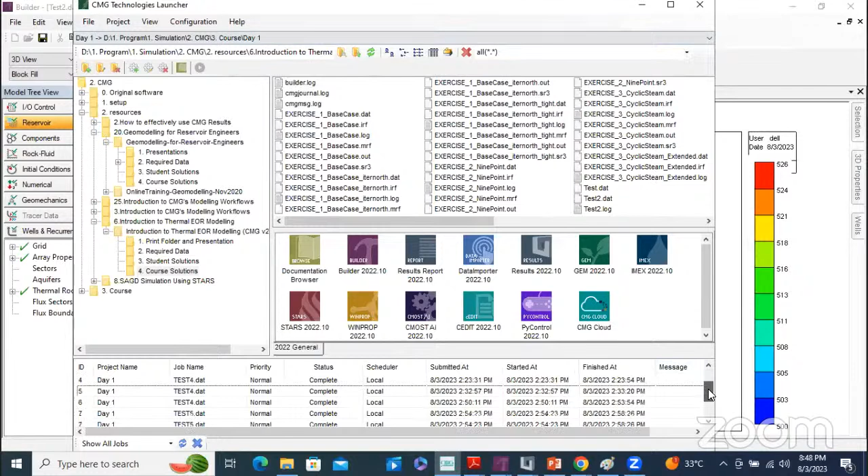And then we can go. This is just to test. We can run from here directly, run normal, but I'd like to go outside instead. Let me go, and I'll show you.

We'll go to the location of your data. I saved it here. Let me check the location file. Yes, thermal EOR. Okay, so here I will go to thermal EOR course solution test 2.

Test 2. Then I will drag it to the simulation version and then click OK.

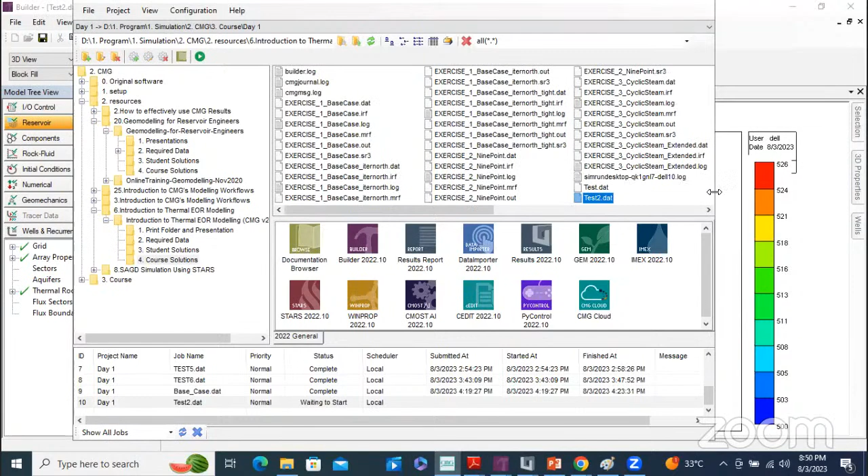I'd like to show you the log. So if I go down here, there's like day 1, test 2, normal, and running. We'll go to the launcher again. It's green. If I need to see the log...

I will be finished soon, just 1 minute. Running and starting to count, running the data, 1% and 2%. It will take 4 minutes, but I'll leave it running in the background.

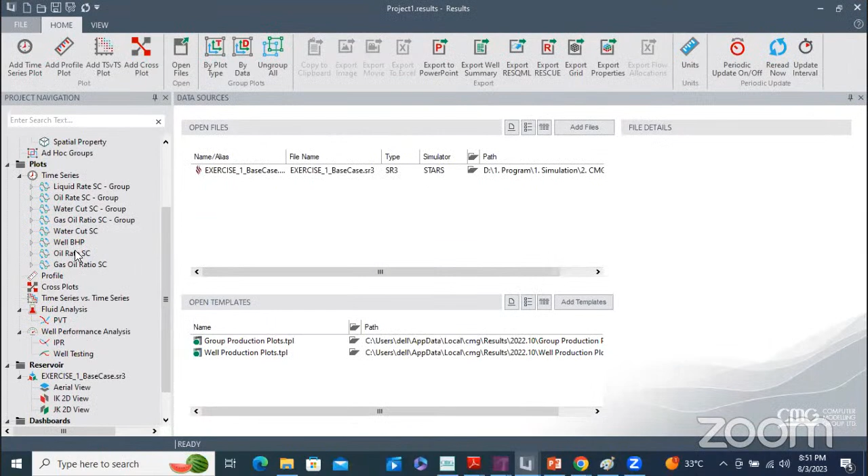After running the data, it's easy to go, for example, to exercise 1 here. This is the other case, and go to results. To show the result. Okay, so this is the other case, a running case. And if I go to select, for example, oil rate and select well producer, this is the oil rate.

And I can show the injection rate also. So I can add a time series for well exercise, injector 1. And from here I can put, for example, water injection rate, water rate at standard condition, add a new plot.

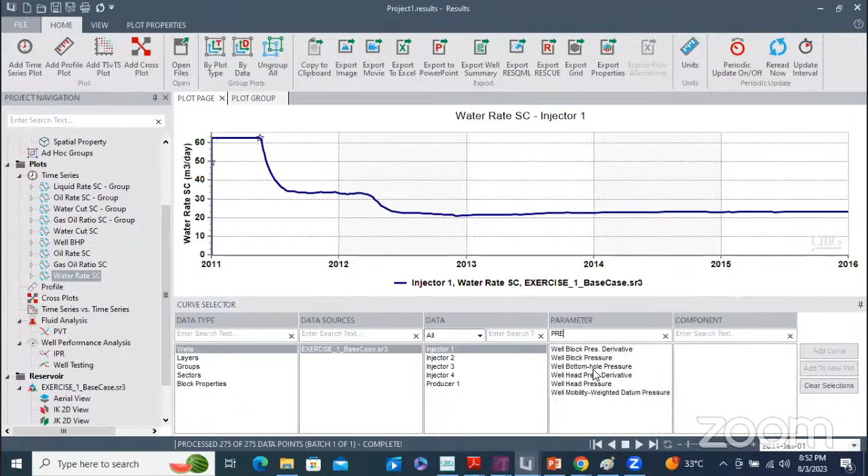So it's not reaching the maximum limit. This is just the water rate, and if I look at injection pressure, bottom hole pressure, so this is a constraint of bottom hole pressure. So it's easy to plot this result, and also easy to see in 3D.

Okay, and from the display here, it's easy to select, for example, temperature, and you can rotate your model and click run. So it's easy to stop and follow the temperature with time, something like that.

There are different options related to results. I think due to time I cannot present them all, but during the course, an interesting course, I can show different cases step by step to build your thermal model and make analysis for your thermal model.

Thank you for listening to this webinar. And if you have any question, I will be very happy to answer your questions now.

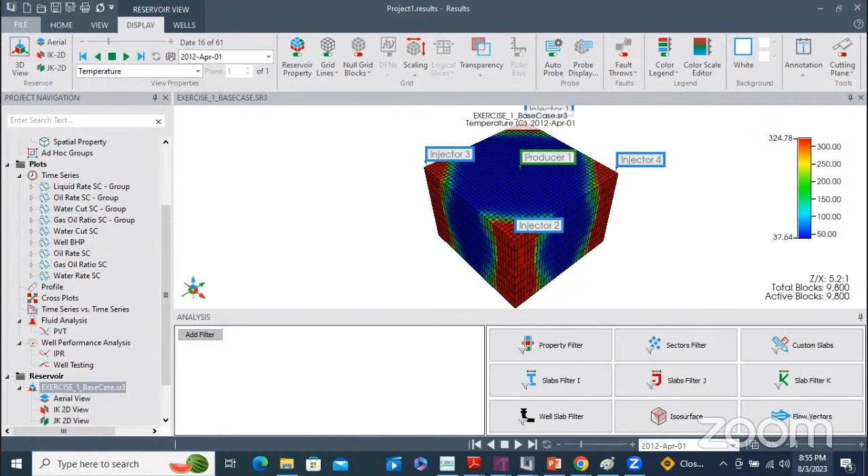When will be the official course date? 19th of August, here. It will be the 19th, not next week, after 2 weeks. 19th of August, 19, 20, 21 I think, and 22 is vacation. Then 23, 24, yes, 5 days.

22 is vacation. Yeah, we just received a question from John. John is asking, how can we combine the results we got in CMG with machine learning? Any idea about this? Look, for CMG, quickly, there is a tool here.

There's a tool called CMOST AI that uses artificial intelligence to build history match algorithms to support quick history matching and optimization. It's also easy to write Python code now for CMG to develop the software, so at this point it's easy to make a migration for artificial intelligence and CMG.

I will not discuss artificial intelligence in the next course, but maybe in other courses if the next one works out, we promise OBA will continue with other interesting topics for CMG. So in future, this could be a really good chance for us.